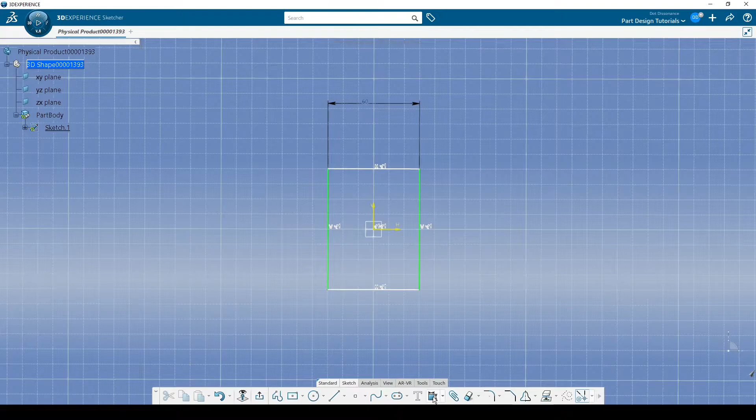So if I go 60 here, and then I go from here to here, and say 60, now when I put that corner in there, I won't get the error.

So I pick these two corners, or you can pick the point, and then it just drops out, and that's all fine. The thing it was doing was adding in a little point right out here in the corner, saying that this fillet exists, but this 60 millimeters is a point that is constrained to this line and to that line right there.

Go ahead and do that on your own if you want to see that. Now, I do have to talk about geometrical and dimensional constraints as well. So we've got our geometrical constraints, they were on, but the dimensional constraints were not on. So something did not happen right here, so I got to show you that as well.

Okay, so I will open this up, and I'm going to turn it on. It's a toggle, it's on or off, and it stays on or off, even when you close and open the program. So dimensional constraints is now on, and so is geometrical constraints.

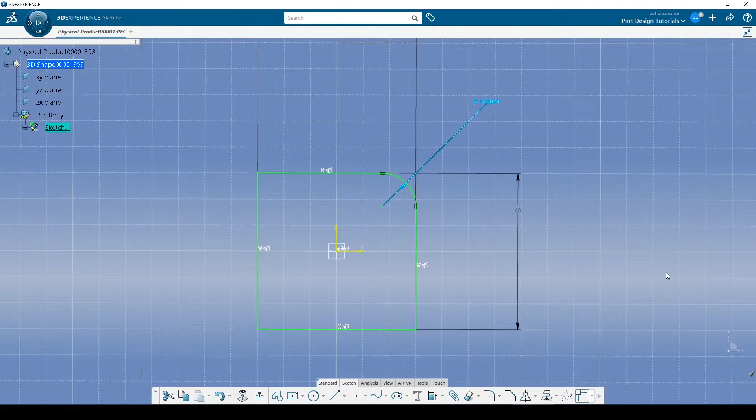So if I go here and I draw my fillet from corner to corner here, the corner, and I bring it in, now it includes a dimension, and you see it's green now because it's still fully constrained. So is that more beneficial to you? In this particular case, I think it probably is, so you would leave those on. Okay, so that's another little insight to what those things are about.

Now I can come in here and I can say maybe it's 10, and then I go through and do the corners on each side. And just to show you, I could grab the point there and bring that out, same deal. Make this one equal to the other ones, or just by hand go here and say 12, 12, 10, 10.

Okay, now I'm just going to leave it there for a second. I want to exit out of here, and we'll pad this up. I don't really care about how far I make this right now, because I just want to show you about the use of either the fillet or the corner in the sketch.

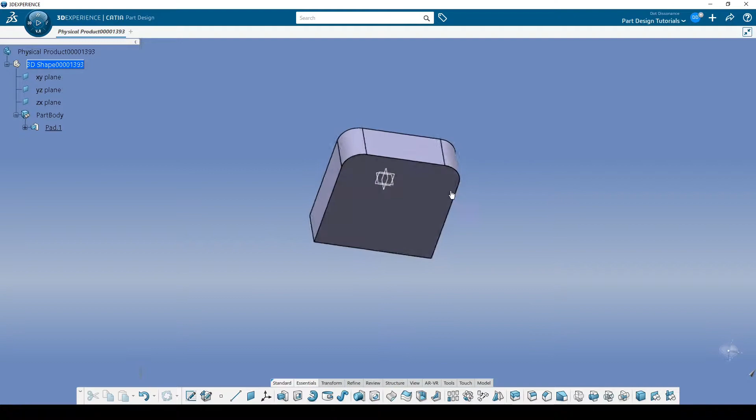But let's say I didn't like it, I want to change it. Well, I've got to know where to go to do this. Now imagine also we've got more items in the tree. I can click on this, it will show me the pad, I can hit the plus sign here, and I know that it's going to be in that sketch most likely.

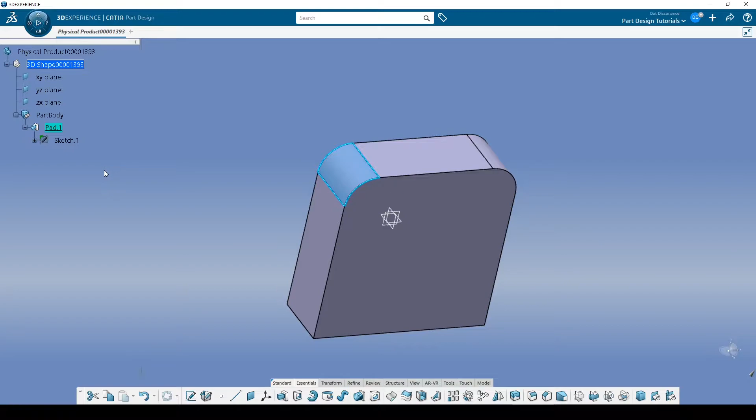But that's if you know that this is actually a corner. You're gonna spend the first couple minutes looking for a fillet. Honestly, again, you can click on it, it'll highlight where it is in the tree, and then you'll find it. So it's not a big deal, right? Kind of. But now if I want to change it, I have to change each one.

12, 12, 12, 12, 12, around there. I could make them be a parameter, and again, it would be fine, but typically it's going to be probably in your best interests to leave it just like this. You also have the benefit of having a simpler sketch, and that's a big concept in itself, is to simplify the sketches that you're creating. Don't put too many features in there. It's kind of a good way to think too.

It takes a little bit to stop looking at a diagram and draw every hole, every corner, every circle, and try to do it all at once. Try to break this down into multiple sketches in your mind before you start. So I look at this and go, you know what, just a sketch first, just a square, just a square. So we'll go ahead and do that, and then we'll pad that up some length.

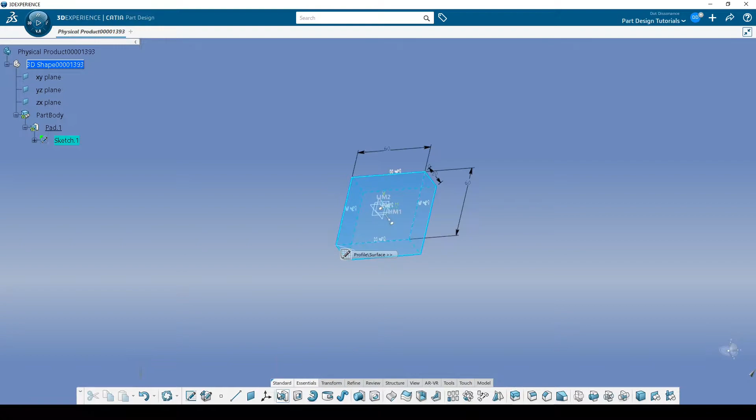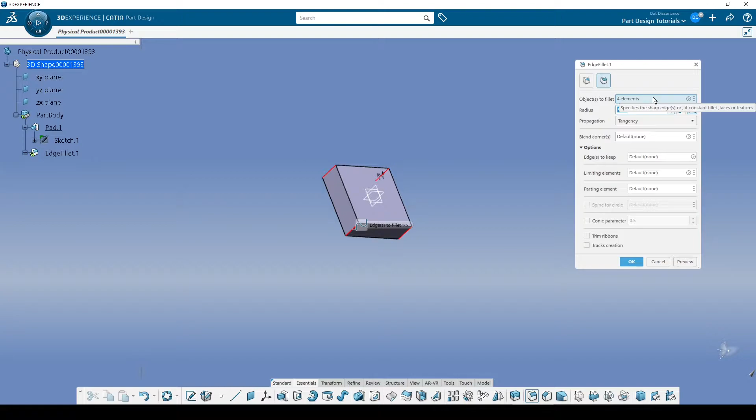Okay, and again, I'm just going to leave this at some value here just to demonstrate the fillet principle, I guess. Then we come by here, we grab our fillet, and I can pick this edge, this edge, this edge, and you can see already in the tree, it's over there. I can say that this is 10, and now if I want to change this because it doesn't quite look right, then I could double click this and say, no, I want them all to be 12, they all change, you see? So that's usually the better option.

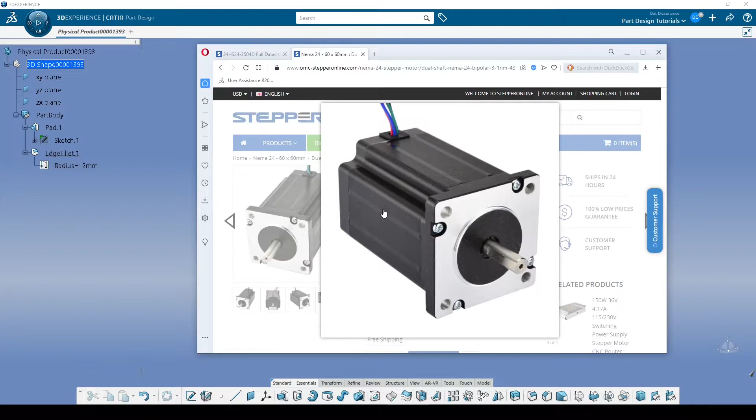So what I think I want to do is, well, actually, if you look at this, it does kind of extend up a little bit more right there. But I'm going to go ahead and just make the flange for right now. I'm really kind of hesitant on that, it's sort of a 50-50. So let's look at the drawing here.

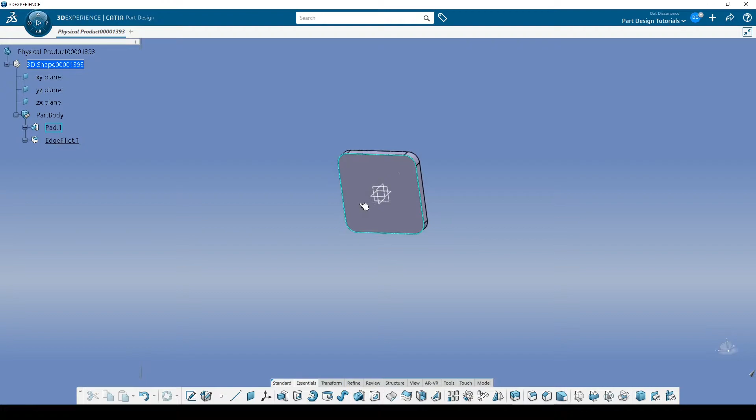If we look right here, we can see the width of the flange is 6.8. Okay, so that's easy enough. We'll go back over here to the pad and say 6.8, and that's going to get us our flange thickness. At this point, I can see that edge fillet, it's just not so good, so let's make it maybe 8. But again, the nice thing is, as long as we're focused on what is dependent on these features, we can come back at any time and change our edge fillet.

Okay, so then which side is going to be the rest of the model? Well, let's see, we started on this plane. Let's continue over into this direction. So I'm going to pick on this face right there, go into sketch, and then let's go back to our data sheet and decide how far out we want to pad this. Well, it's got to go 88. So I think that's pretty obvious.

Look around, see if there's any other determining factors. So 88 max, that's fine. We'll go with 88. But we have to take 88 and subtract it from here. You see? Subtract this from that. So that's cool, we could totally do that.

Then to call back to some other stuff we've looked at before, what I want to do in this case is write a parameter. I want to write a couple parameters just to put this out here a little bit more frequently. So I go here and over to my tools and find my formula. I'm going to make a new parameter of a type of length, right? I hit this, don't type anything in there first. First hit new length, and now this is the one right here.

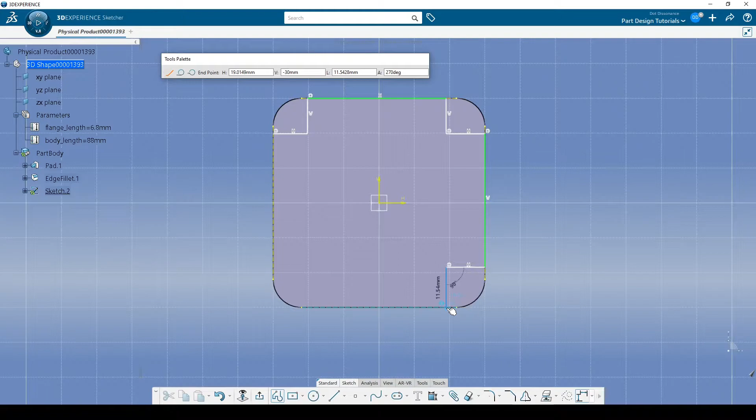So I go here and snap again to that yellow line. I go to here, bring this out. I'm snapping to that thing up at the top. Do I want that? Yep, that seems okay. Click, get over here to the other one. Now what if I didn't get it, right? No big deal, if I need it, I'll add it later. Get that up there, and then I'll snap to the original point.

Okay, so we've got this shape going on. Do you see what I'm doing here? This is to talk about sketch simplification. Is this the way I would always do this part? I don't know. As I'm making this lesson, this lab, going through this part, I've made this part a few different times now—actually multitudes of times over the years because we build CNC machines and I've had to model separate motors quite frequently. Do I do it the same way every time? Probably not, just because it's not the ultimate decision on the best way to do it. It's like, works good for now. Just start clicking, you see?

So if we go back over here to this, I want to talk about model simplification. In this case, this seems like a really good way to do it.

I could have padded the whole thing up first, and then just pocketed these holes down to here and left a little bit of a gap distance. We've done offset a little bit before. I could have made a circle up here, padded it all the way down to this bottom surface, but you're allowed an offset value, so I could do a negative offset and say come back 6.8 millimeters. I could do that too, right?

I think you could talk a long time about all the different ways you could do it, and you'll find out that 8 out of the 20 ways are all perfectly fine, and it doesn't really matter. You just got to make a choice.

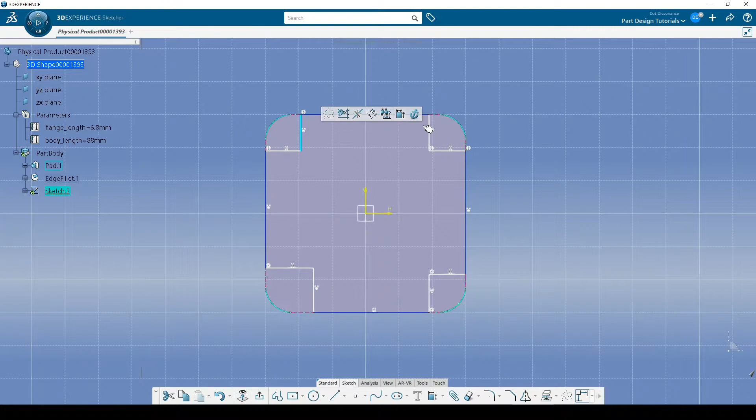So now I can pick this, add a constraint, and say that it's so far away from that edge line. I'll say that it's 10. And then I'll take this one and do the same thing right there, saying that this distance is also 10.

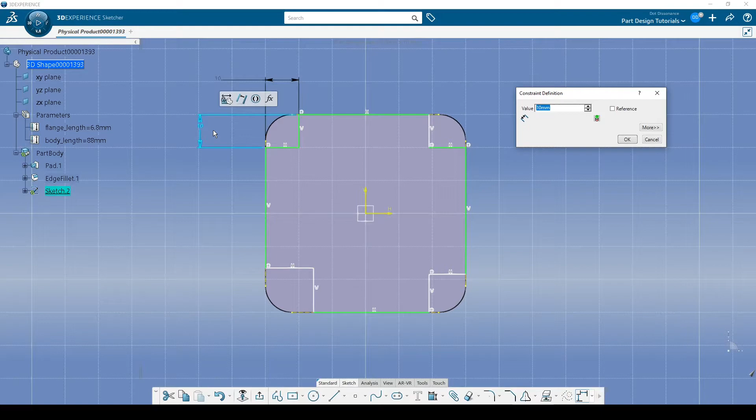Now I think it's a good idea to hit equals, click on your background, and select that parameter. We could make a parameter for this, but what I want to get going here is that I have this feature defined. Whatever this notch is, I have it defined by one constraint, so I can change it, and they all change because they are always going to be the same.

And I'll go through and do the rest. Now, as I click on this, here's the thing I think about as I do this. I start clicking around, and remember, you can't get to it from the other menu there. As I start clicking around, I start to notice that maybe this is taking a little bit of time, maybe this is being kind of long.

Well, I could have left it as a solid, and I could have made this one square as a pocket, and patterned it around. I could have done a rectangular pattern, I could do two of these, I could do a mirror, I could do a mirror in Sketcher, or I could do a mirror of the solid that I make. So just tons and tons of different ways that you could do it.

And this is why I'm saying that you make the model a few different times. As I make this, I keep thinking, man, for the class lab, I probably should have done it a different way. Let's do it a different way. Well, no, I just want to talk about this.

I think it's better for me to just mention that there are a myriad of ways, and you would probably make your model over and over again if you wanted to try to determine what the best one is. I would honestly have to make this video like 10 different ways, 10 different times, to show you all the different ways.

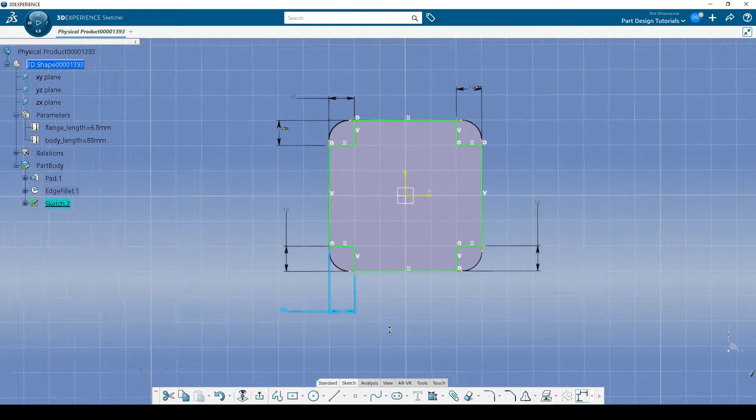Now, did you notice as I was constraining these that some of them I didn't have to constrain all the way like this one? That is because of the auto constraint that was made right here. This is even with this. And so if this is 10 and that's even with that, well, then I don't have to put a dimension out here.

So knowing that kind of behavior, if I was a little bit more mindful of what I was snapping to when I was doing this, maybe I could have gotten away with not having to do all of them, you see? So let's call this good. Again, many different ways to do this, but let's call that fine for right now.

We'll exit out of here, and then we'll pad that up. Well, how far? We're going to pad that sketch right there, and the length is going to be this body length, and you're probably going, yeah, but that doesn't include the flange length. I know.

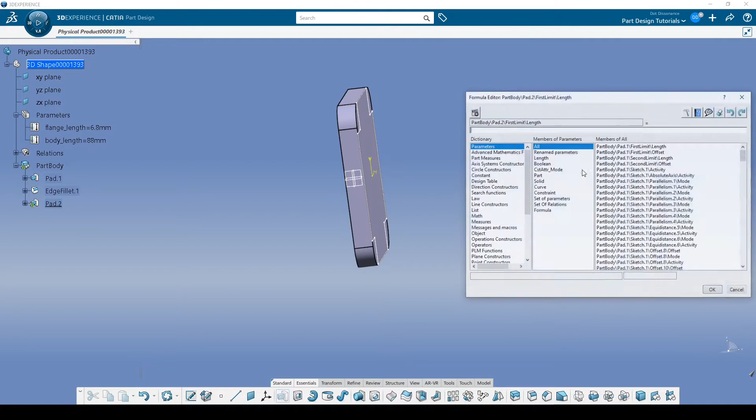So we go edit formula, and we come over here and say, okay, well, it's this parameter. You can go ahead and click it, but all the stuff that we make is under renamed parameters. So you go to renamed parameters, and we say it is body length. So we want to use body length, but then we're going to subtract whatever the flange length is. Do you see what we're doing here? Then we hit OK, and then we're done.

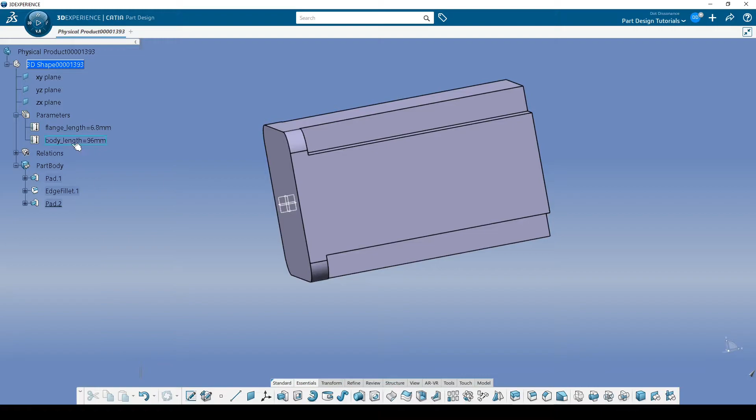So now, anytime I come back here and I need to make a larger stepper motor, or somebody that isn't me that just walked up to this and says, oh, body length, I need to change that. You can come up here and change this to 96. And I can tell you that dimension right there is not 96. So if I measure from there, you've got to pick these to there, the distance is 89.2. So subtract that, 6.8, right?

Okay, great. So then we'll come back to here and we'll probably end up modifying that curvature, that notch. You see, I didn't put a fillet on it yet. We'll deal with that later. It exists, but I need some context.

So what I'm going to do next is I'm going to make these holes. So they're 47.14, 47.14. Make sure you look at this, because there are a lot of things I deal with, the drone motors and some things are not always symmetrical, okay? So there are four of these at a diameter of 4.5 millimeters.

Easy peasy. So we'll go over here to the face, we'll pick on this, go to sketch, and in this case we will draw a centered rectangle, bring this out, and then make it a construction element, right? And then we go to dimensions, and we're going to dimension this.

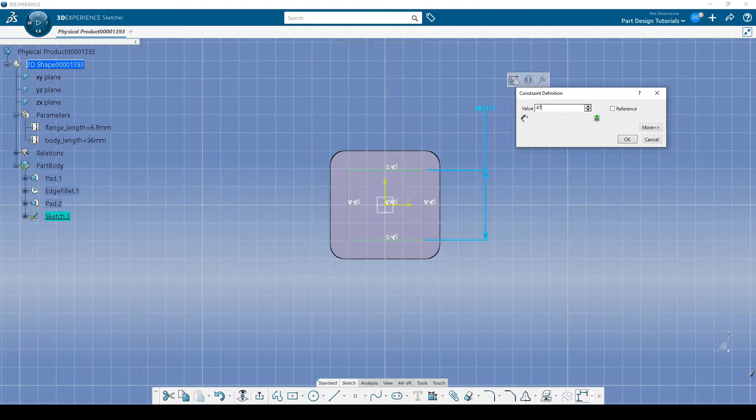47.14 was it, I think? Whoa, why did that just happen? And let me go check. 47.14.

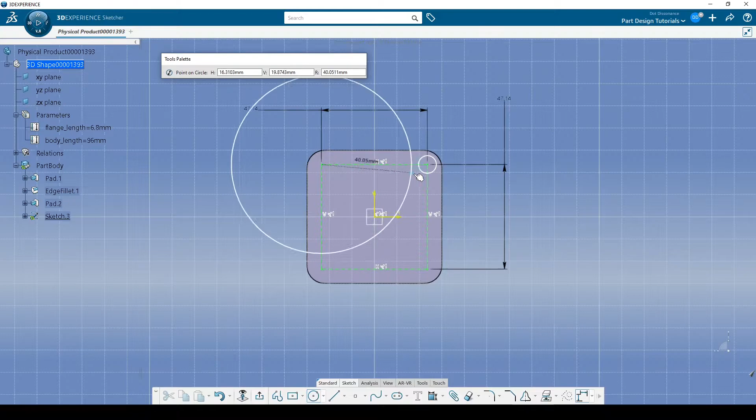Okay, now I can make my circles. Make sure your construction elements are not on, and then we snap our circles to the points right there. Now, get ready to hold your shift button down. And by the way, if I double click circle, double click it so it'll stay on, I'll snap it. But now the more geometry I have in Sketcher, the more things you'll find that it wants to snap to.

And I think you should probably develop a habit of holding down shift almost no matter what, if you're not certain that you need the constraint. So the first one, I know I needed it snapped there, but after that I hold down shift just to keep anything else from sticking to it.

And notice, by the way, that I don't really care what size it is. You see, that's another thing to think about, is I'm holding down shift, I don't get the constraints, and then just make it as big as you need, because maybe that's going to make it easier to select later. A lot of times if you're trying to get it as close as it's probably going to be and then dimension it, there might be too many features around there that make it kind of hard to get a hold of, you see. Now I'll double click constraints so it stays on.

I'll bring this out and I'm going to say 4.5, and then I can pick the next one. Oops, 4.5, the next one, 4.5, next one.

All right, now you notice that these are all on radius, so that's kind of an oops, right? So it's not a radius, they're a diameter of 4.5. Oh, darn. Well, here's the thing. In some other videos, you might have noticed this before just on your own. I want to do a thing. I want to make these things equal to each other, or maybe I want to make a parameter for them. For whatever reason, they don't like diameter for parameters, right?

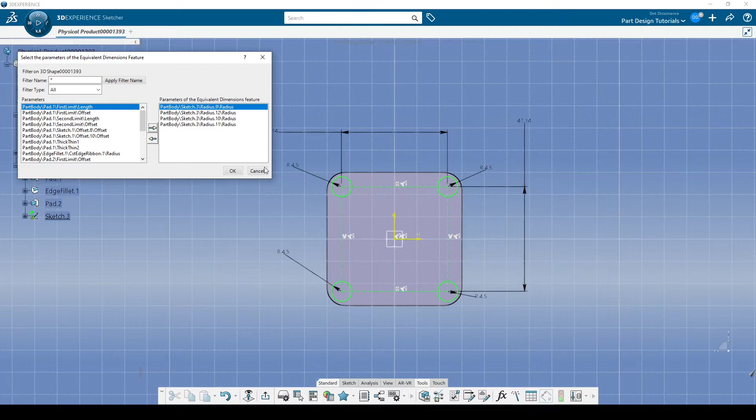11. Okay, so now all of those are added in, and you hit OK, and it says, what do you want these things to be? Okay, well, I don't want them 4.5. I need them 2.25, you see? And now they'll be equal to each other.

This happened, by the way, in a previous exercise where we want a dimension. So we've got the job done. They're all equal to each other. They're a radius, that's fine, except us humans looking at a data sheet, we want to change it to 4.5. We might not want to do the math. This might be a lot deeper decimal number than 4.5, and the math might be a little bit harder to do, or I just don't want to do it.

So what you could do, again, what we did in previous lessons, is make a parameter for the diameter, and this thing here is a formula, so it's half of whatever the diameter is. That makes it easier, okay?

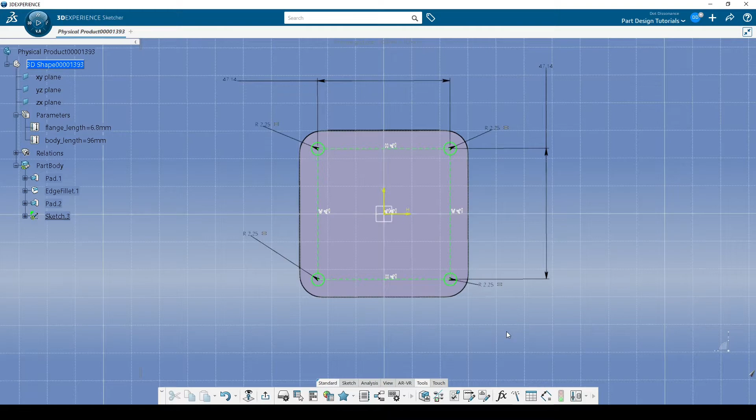I'm going to leave this one as it is right now because I just want to show off the equivalent dimensions feature in Sketcher. Then we'll exit out and pocket these up to what? Up to last? Well, we're going to pocket them up to here. We could make it a dimension, right?

6.8, and that's what the flange is. That almost never makes sense, by the way. So many people do this, or they just make it a million or whatever, right? Use these, learn to use these.

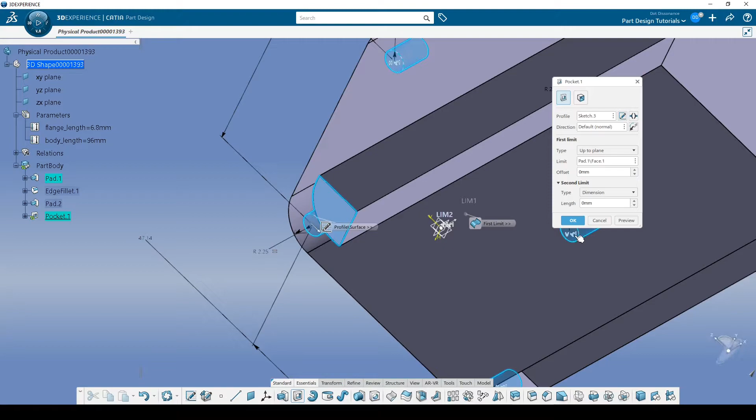Up to plane, up to surface. It is a surface, but we're doing all of them. This is a surface, that's a different surface over here. So pick up to plane, and this will make an infinite plane for everybody to go up to, and no matter what, if we decide to change that flange length, that will change. Oh, by the way, our flange length right here, that's 6.8, we never associated it to our first pad.

So let's fix that real quick. See this right here, 6.8, hit equals, click on the background, and now it's associated to that formula right there, that parameter. So let me show you what I was talking about with the hole now.

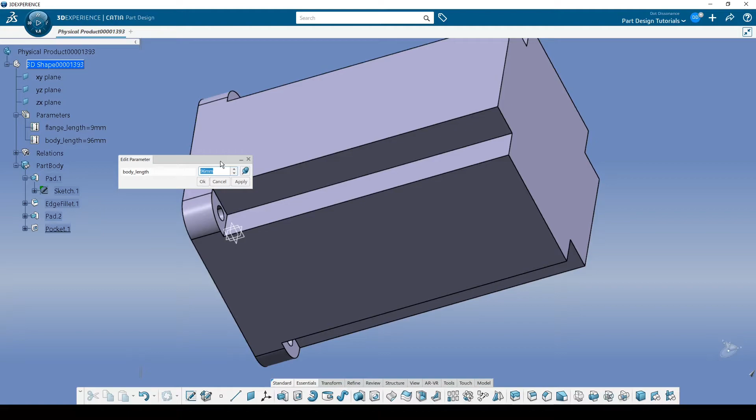So if I make this, instead of 6.8, be 9, well, that right there is still going all the way through. Obviously, the flange changed size because we associated it, but also realize that this body length of, well, 96 - I got to change that back to 88. The body length here is still 88, the total body length, because it always subtracts that flange from it.

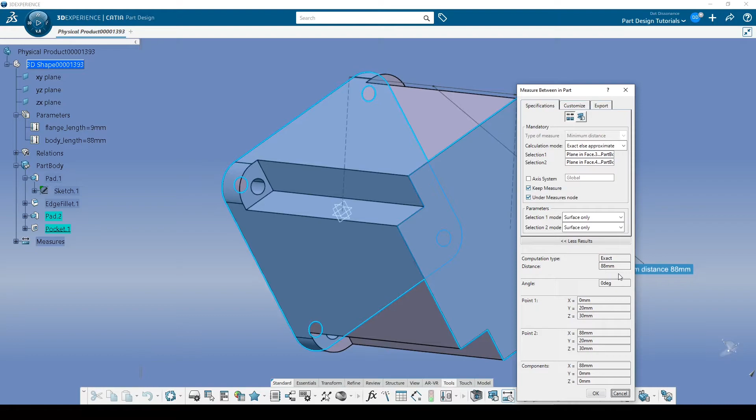So let me show you with the dimensions again. Surface, surface, sure, here to here, 88. You see? I don't need that there.

Use your parameters, get used to these things. They are pretty much mandatory once you start to get used to them.

Okay, so we are kind of almost done. Kind of. So let's see where these holes sit right here, right now. And so then we want to decide, do we want to pull this in or not? How do we want to deal with the fillets?

Well, let's do the fillets first, because I can tell you that those are semi-arbitrary. They kind of don't exactly matter terribly too much. We just want to model it in just for looks, okay? So we'll leave it at 8 for right now.

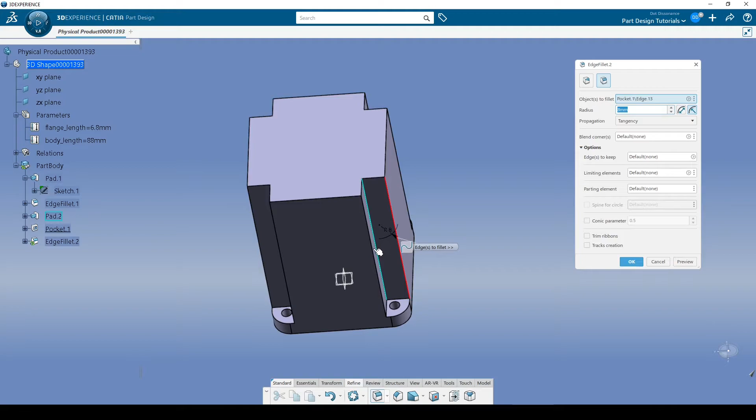Pick here, pick there. Remember, you can turn on hidden edges if you don't want to have to rotate around. I find that turning them on and off is about equal to me just rotating the thing around. Then let's say 10 and see what that looks like. That's entirely too much, right? So we'll say 4.

Might be a little bit more than that or a little bit less than that, but we'll see in a second. And now this one right in there, yeah, let's shrink these down just a little bit more. Make it 3.

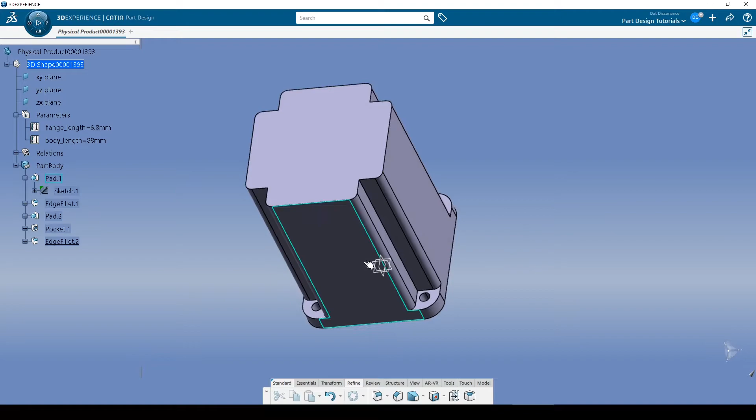By the way, very specifically, I'm making this fillet separate from these fillets because of the purpose, which I'm going to get to here in a second. So let's go ahead and just add it in, and then let's talk about that. So put these in, and we'll just make them, I don't know, 4 or 5 or something.

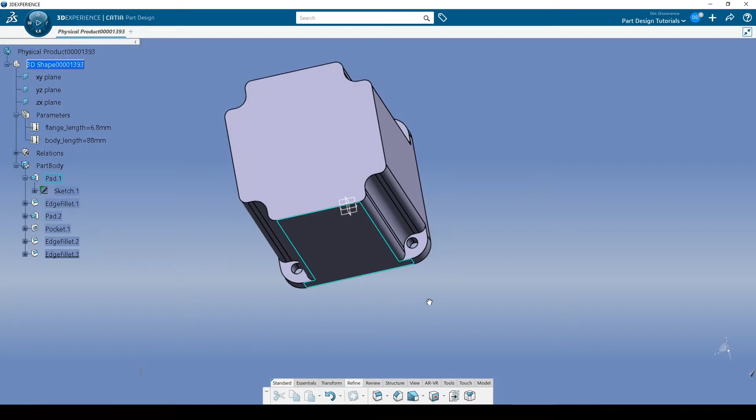Okay, so what is the purpose of these grooves? Well, what you're going to attach the stepper motor to the body with is a socket head cap fastener screw, okay? So if you want to look this up, which I'd suggest if you really want to do this, the hole was how big? The hole was 4.5. Why is it 4.5? Because it's for an M4 fastener.

So you'd go look up an M4 fastener and figure out what is the head of an M4 fastener. So you'd search M4 socket head dimension.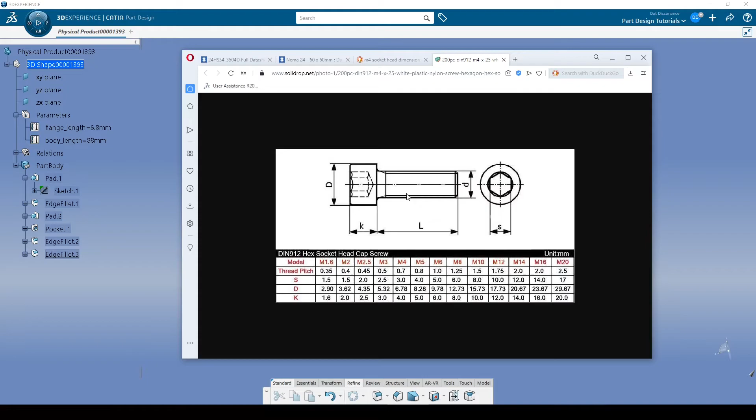At least we can go, yeah, I kind of know that 6.78, that's probably going to be plus or minus a little bit, probably normal, right? From a socket head M4.

Then knowing what we know now, we look at this and we see that, okay, well, we understand that this groove here is for the head of the fastener, about 7-8 millimeters or so, right? Enough to have clearance for the head of the fastener and the wrench that's going to come down here to try to tighten it. So we need to try to pull in this feature.

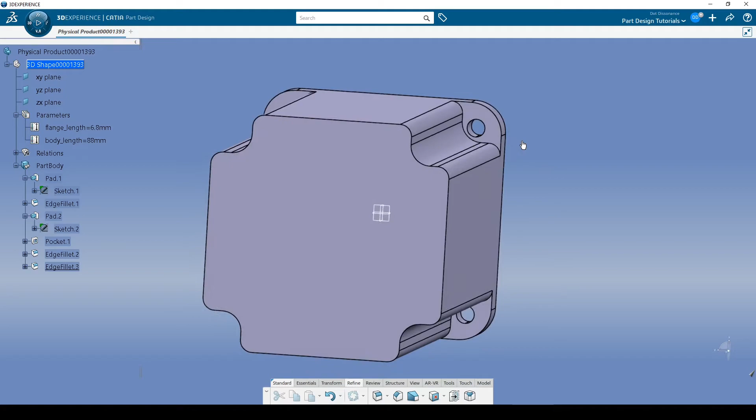But this is the point that I want to make about a lot of this: do it again, in order of operations. You really never get it right to begin with, and you have to come back and make a change. So what I could do is come back to this pad here, edit it, and start pulling these in a little bit until it looks like it gets to where it needs to be.

But that's the bad way to do it. That's a bad way to do it. What I would really like to do, now that I've started to build the model and got kind of dug into it a little bit, I went to do a thing and then I went, well, wait a minute, what's the purpose of this thing? Oh, it's for this. And that means then that this needs to be this dimension, shape, this far away, or whatever the case may be.

Well, inevitably, it feels to me like anything I do to this shape right now will be a band-aid. And what I need to do is fix it from the get-go to make it right. And what I mean is this fillet that we added right here and that corner that's right there, we need this element here to be somehow relative to this circle.

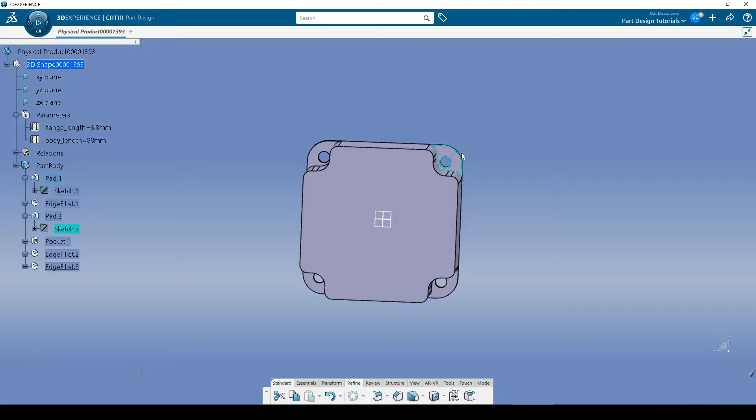What would be really great now that we're here is that maybe this thing was just a square. Then we just make a circle on, say, the face of this up here that is concentric with these holes here, but the right dimension, and then we pocket it down to that feature. You see kind of what I'm getting to right there? So let's go ahead and do that, except we have another problem, which causes us to have to learn another thing.

I want to go here to this shape right here. I want to get rid of these lines, and I'm going to turn them to circles, and make them concentric to, oh, where's my holes? The holes here, see, we're here over in the timeline, right? In the tree, we're here. The holes are in the future, so I can't see them yet.

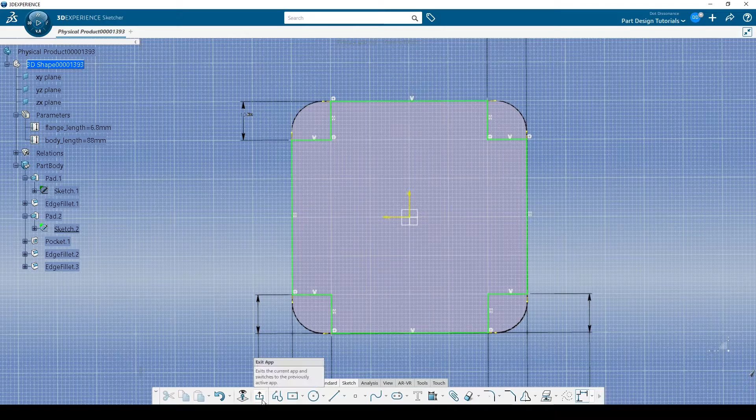So what I need to do is either delete a whole lot of stuff or figure out how to change things in the timeline, reorder them. Now, in order to talk about that, well, I can just tell you how to do it. It's going to be something like take this pad right here and you go to reorder, and I'm going to say that it is after, before, or inside a certain feature. Everything that's yellow, I can't put it there, but I can put it after pocket 1, and that's what we need. If I put this feature here after pocket 1, then I'll be able to see the holes.

Now, if this wasn't such a simple tree at this point, and we didn't just make it, you might not easily know or remember what thing is dependent upon another.

So we have this really great feature that if I want, I can right click on, say, pocket 1 right here, and I can go to parent and children. Parent and children will show me what elements are dependent upon what. So right now you're seeing what are the parents to pocket 1. What is pocket 1 linked to, connected to, based on? And that's hugely important.

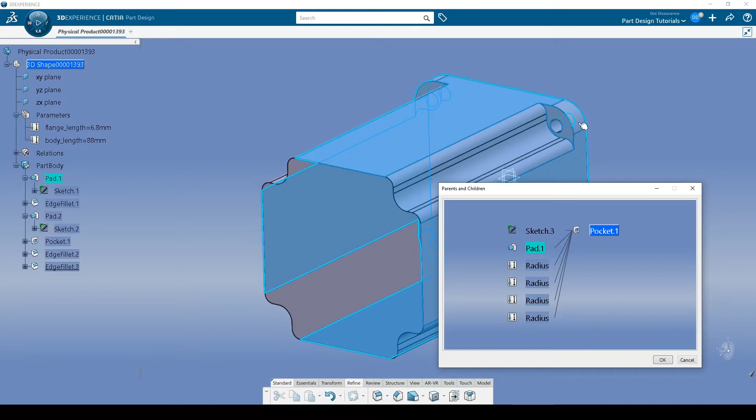So if I look here, pad 1, yeah, that's pad 1. Oh, of course, because pad 1 is what made that flange, and that's what I've got the pocket based on the face out there. Sketch 3, oh yeah, so that's my sketch right there. The radius is inside of it, you see?

Now, if I want to take this a little bit further, I could go ahead and double click on, say, sketch 3, and then it's kind of hard to work around in here, but it'll show you what are the parents and children of sketch 3. Let's go to a different one.

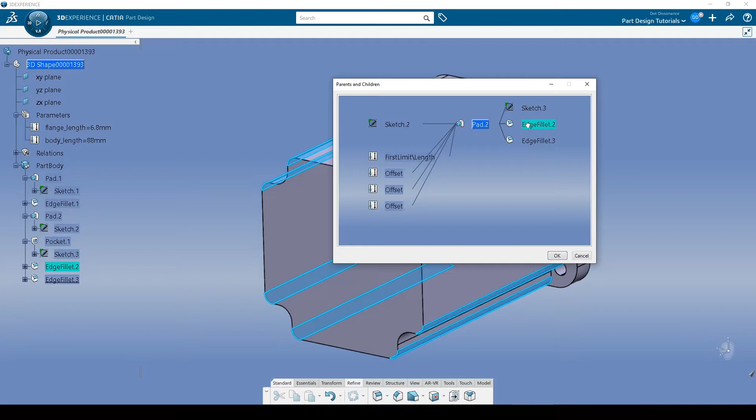I'll show you pad 2 because we're going to end up moving this around. We'll go to the parent children of that, and we can see that pad 2 is based on sketch 2. And sketch 3 was made from pad 2, and the edge fillets after it.

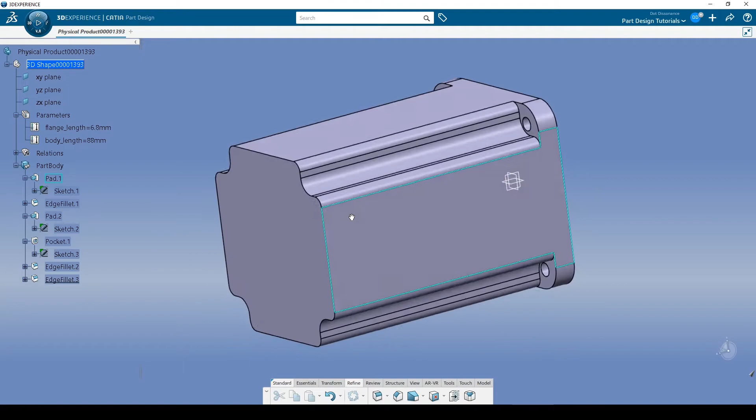But if I go into sketch 2, you can see that sketch 2 was based upon pad 1, edge fillet 1, and some offsets there. Remember that. I don't use it all the time, but it's really important if you want to see why certain features might be giving you errors, because it's tied to another thing.

You try to delete a feature and 16 other things disappear that you weren't expecting to disappear. Well, it's highly likely that those things were in some fashion connected to the other. So then, time to fix.

So what I need to have happen is I need this pocket to be before this pad, because this is the pad that has the sketch in it that we want to align with that hole. So I'm going to right click on pad 2 and go to reorder, same thing I just showed you a second ago. Then I'm going to say after pocket 1, hit OK, and now it moved.

Don't worry about what just happened. It moved pad 2 after pocket 1, but it does an interesting thing. The underline is where you are in history, so it's a marker. We just rolled back time to where we're back at edge fillet 1. It's kind of a thing that it does when you do this.

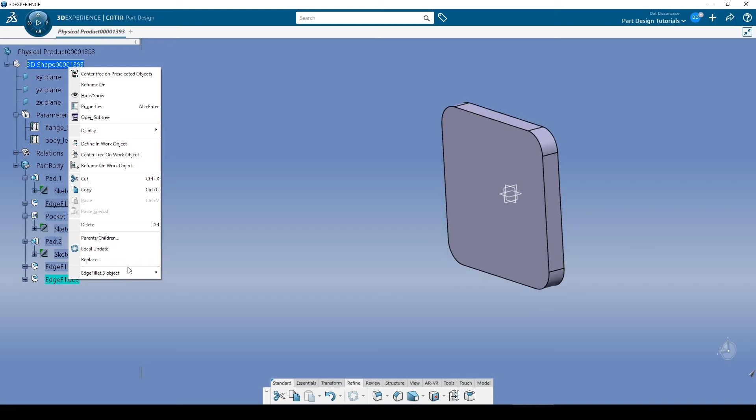So you have to remember to right click on the most current item and then come up here and say define in work object. That will move the line forward, and there's all your stuff. That thing right there that just happened gets a lot of people.

They don't know what's going on. They think they just blew up their model, and then they continue building. Later someday they realize that the timeline's not right. They reset it, and now all of a sudden all their parts come back over the top of all their other parts. So now let's check this out.

So if I go to pad 2, the one that has our kind of rectangular shape on here, if I double click on this, now I can see my holes. So now everything is much, much better.

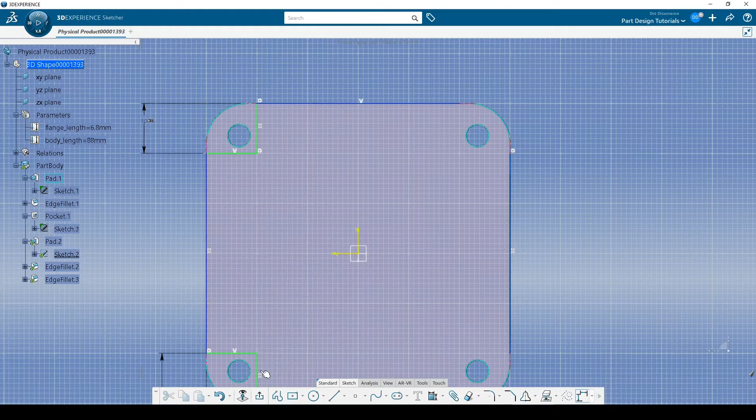So now what I'm going to do is we're going to bring some lines back a little bit, but I'm going to get rid of them for the time being. Oops. Oh, that's because it's got a formula attached to it. No big deal.

Then over here on the side, I almost always do this off to the side. Let's double click it, and we'll just make 4 circles. I'm going to hold down shift and just make a bunch of circles right there. Hit escape to drop the tool.

Then I can come over here and say constraint from that to this edge right there, and then you can come up here and pick concentric, or you could right click and say concentricity. Either way, I'm kind of still used to right clicking. Oops, didn't get the right menu. Hit your constraint, hit that, get right on the edge there, right click concentricity.

The other way you can do it is I can hold down control and pre-select the two things and then go to constraint and do concentricity. All right, and the last one.

Now we need to dimension these. So that's already known, right? So this one here, should we go 7? Should it just be a snug fit, or should it be 8? Let's go 7, we'll say 7.

Oh, and remember it's a radius, so we have to change this over to diameter. I'm not going to write a parameter or anything for this, I'm just going to leave it be 7.

Okay, so that's going to be our circle, but we have to get it connected to these lines over here. To do that, we could make this a construction element, and then draw some lines up to it and do an arc around it. We could do some trimming, but I don't think we've done any trimming yet, so let's do that as well.

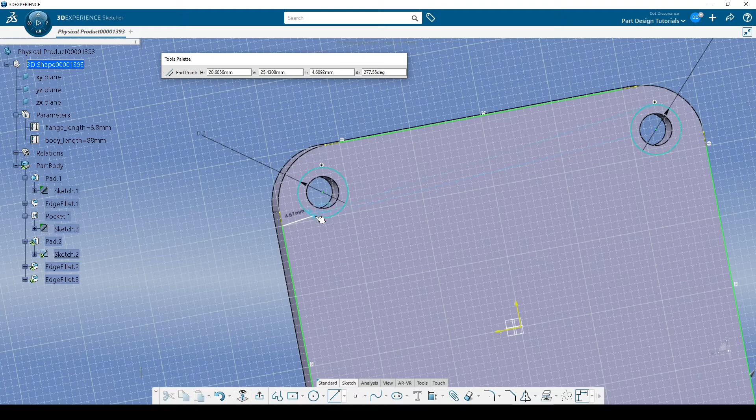So we'll get our line tool and bring this up here and stick it right to this. Now, do you want to go right to the edge of it right here? Well, here's kind of the thing. I want this circle to drive the length of this line right here.

So you see it moves, right? It's not actually anchored by any dimension. Don't put one there. So here's what we'll do: I purposely moved it down, and then I go here, and then I pick that just on the edge. You see?

Now what I will do is take that line, grab my constraints, and pick this one right here, right-click, and make it a tangent.

See, so that's going to force that line to be tangent with this circle right here. Then I'm going to make it perpendicular to this line, or horizontal or vertical, either way. Let's do a perpendicular.

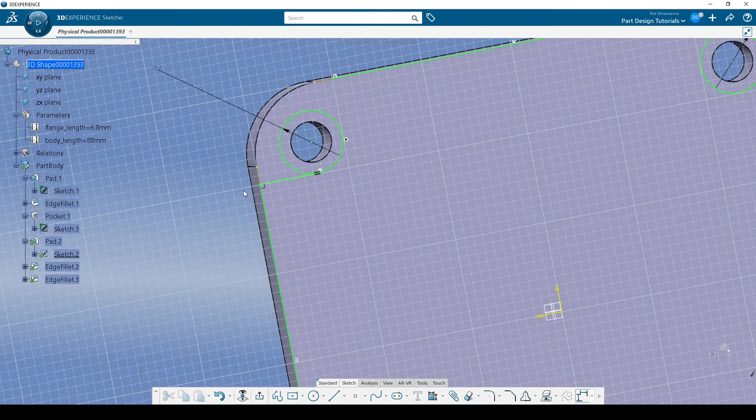Perpendicular. You see? So now that puts a nice little corner. So I know that this goes up, comes straight out, hits that corner right there, and back in. See where we're going with this?

Okay, so now that's done, the next thing we got to do is get in here and trim some of this stuff away. We have a few different features down here: break, trim, and quick trim. I can tell you the one we want to use is quick trim. Trim and break are kind of for other different things.

You might want to test those on your own. That would be for a later video. Trimming excess elements or breaking a line, and it actually doesn't erase one, it leaves two sides. So you can take one line and break it into pieces by an intersecting line.

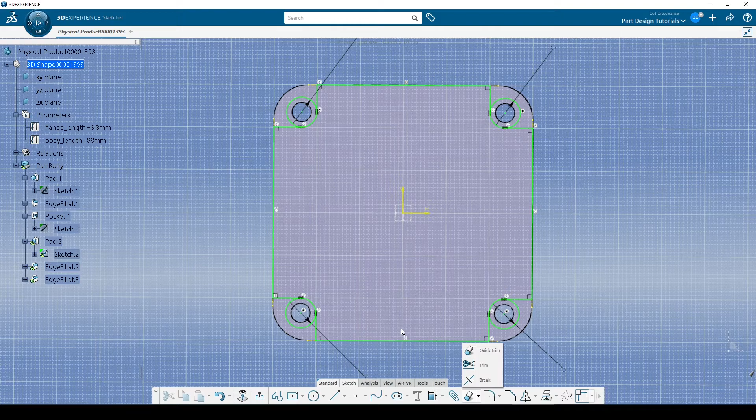So we just picked the quick trim, and it works probably just as the way you would imagine. It's an eraser tool. So if I come up here, I pick this, it trims it to the limiting elements there. So it works pretty good.

So I'm going to double click that to keep it on. We'll erase that, and we'll erase that right there, and we'll erase that. And then we're done. By the way, notice with just our geometrical constraints and a few dimensions on the circles themselves, we're able to fully ISO constrain this entire sketch based upon the curvature, that radius right there.

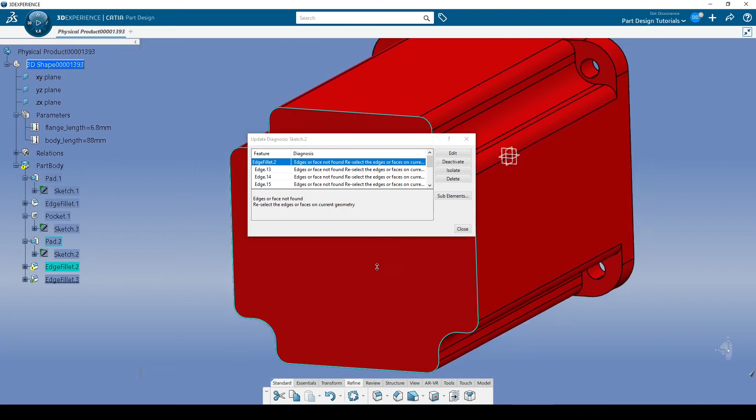So then we can exit out and then we're going to have some problems. Now, depending upon what you do, you could have more or less problems. I do want to mention this.

Red is bad, right? Red looks bad. Well, I want to tell you that red doesn't mean error, it means update. Just kind of letting you know it's trying to update. Sometimes, especially in the older days if you had a slower computer, as soon as you make an edit in sketch and leave, your part goes red for just a quarter of a second, but then it's fine.

You're like, oh, that was weird, it was red for a second. Well, it was updating, updating the part with the new information. Right now it's trying to update, but it's stuck because it's saying something is not working.

Now, I can tell you, though, thankfully, the things that are wrong are just these edge fillets, and that's not even a big deal. So what we got a problem with, if you look over in the tree, just learning how to read this, the part body has an error.

What part of the part body has an error? Well, it's edge fillet 2. It looks like there's something going on with edge fillet 3, but if you look close, this is a little swirl - that little swirl icon is the update icon.

So edge fillet 2 has an error, and because edge fillet 2 is having a problem, edge fillet 3 cannot update. It can't apply the information, you see.

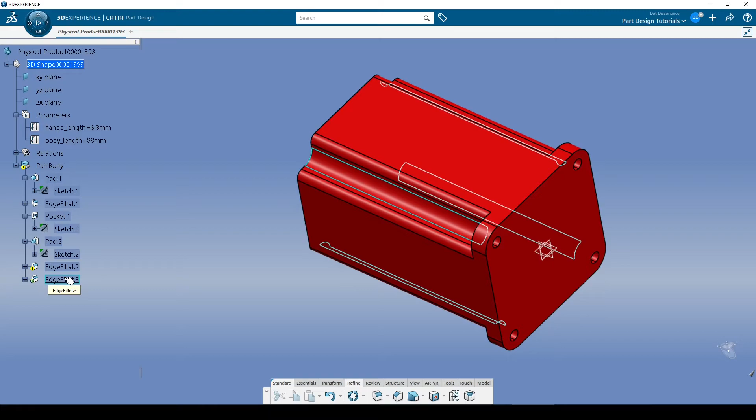So when you get in here, what you see are these yellow dashes, and they're trying to tell you that this is where the fillet used to be. The part that's kind of confusing here is that that edge still exists. So you think, well, what's the problem?

Well, whenever you change a feature, like the sketch that we did, we changed it enough to where these edges, yes, they still exist in the same place that we had them before, but somewhere in the background of the database of the CAD software. They're not named the same any longer. So the link that they're tied to got broken.

It's real easy though. You just come by here and you pick all the edges. I'm not picking the yellow, by the way - I'm not trying to dodge it. I'm just saying know that what I'm picking is the actual edge of the model.

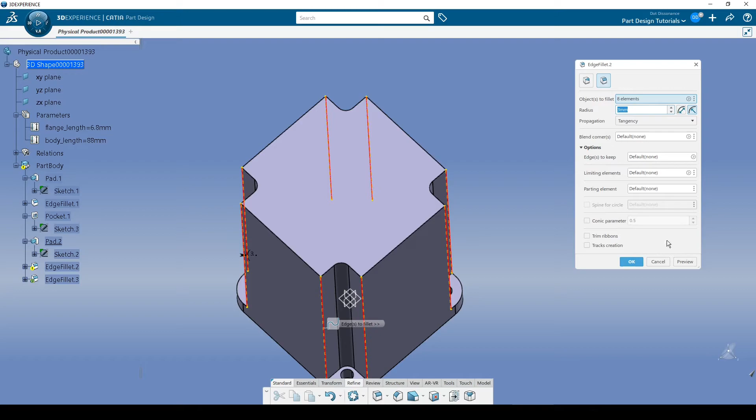So sometimes it might show your features floating out in space because the edge was far away. You would pick the new edge to go to. So pick that one, and that one. 3 millimeters will be fine.

But then the next one that was waiting to be updated has some issues now. We're going to do something different with that fillet, which doesn't even exist anymore since we're not using it. We could delete it here, but we'd have to delete all the edges. It's easier if you just go here, hit delete on your keyboard, and get rid of it.

So it looks like almost nothing changed, because that edge fillet happened to be just about the size of what the curve was that we added into the sketch, but all is good now.

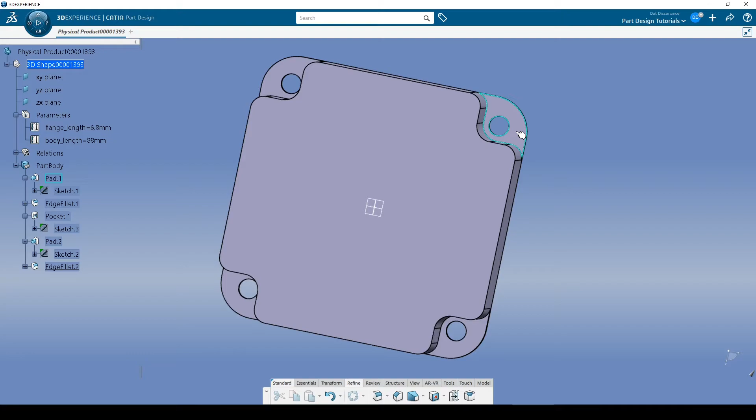If I wanted to test this out, I could check the radius right there to see what it is. I could go to a sketch, model up another fastener, and actually try to put it in there. That's a really big benefit of assembly, something that's a bit down the road, where you start making other parts, bring them together, and then you can look around at them and measure them and check for fit.

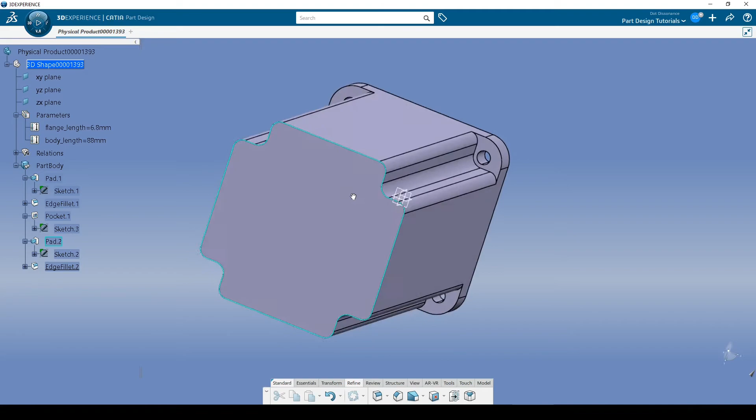So we're done with that. We're almost done with this device. Only a couple more things to do. The next one will be super simple.

We need to go back to here, back to our drawing. This circle right here shows us that it is 38.1 millimeters diameter, and it's also 1.6 millimeters tall. So we've got it all right there, right? 38.1.

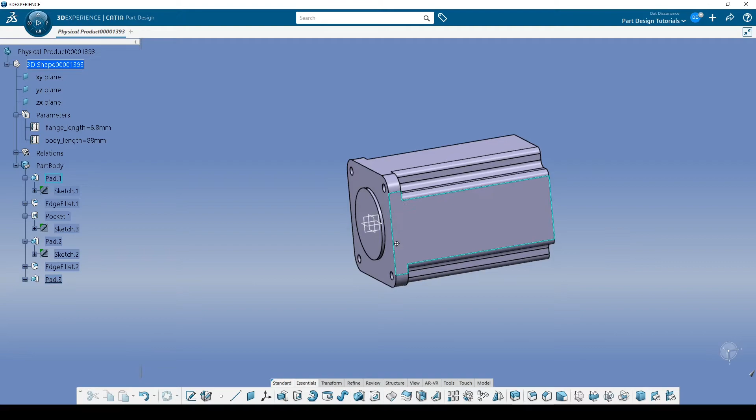Click on the face, go right here, make a circle, snap it to the center, bring it out, dimension it 38.1, then exit out, move over to the side a little bit, and we'll pad it out 1.6. That's kind of it, you see?

Now if you actually look at the device, just a thing I always do because I know it exists, you see right here there's a tiny little bit of a chamfer or slope. It's a draft, just a little bit of a draft. It could actually be a fillet too, whatever you want to do here, but there's a little bit of something going on there. So since we've done this recently, let's add it.

We come in here and go back to refine to get to our draft. To define our draft, we need the face to draft and a neutral element. We're not going to do any fancy stuff, no parting element or limiting element. We're just going to say draft that face, and the neutral element will be this.

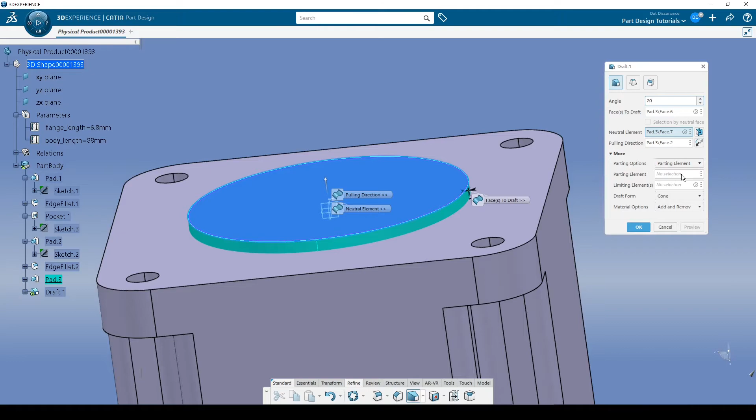I could use the base down here, but let's make this a little bit bigger, let's make it 20. We'll preview - you see the little skirt that's getting drawn out here, coming down from the top. The top dimension will remain that 38.1.

If I use the lower base of the flange as the neutral element, it will bend everything inward, and now my dimension will be incorrect on the top - the 38.1 will be a little bit smaller. So actually I think this might be 20, let's just hit OK and see how this goes. That looks nice.

So now this is actually a dual shaft motor, so we'll have to do both sides. We could make one shaft and shoot it all the way through, but I think we'll make each one separately. What we're looking at here is a few different things, so let's zoom this in a little bit.

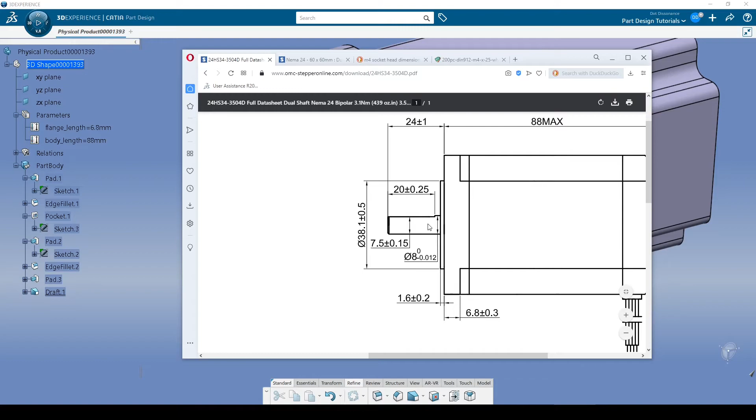So we've got this dimension here, 7.5, but we've got this 20 right here, and you see this little notch? Well, this isn't really the keyway per se, but this is where we're going to put an Allen set screw down here to lock a coupler onto the motor. So that's a flat section - it's saying that flat section is 20 millimeters down, and from the flat side to the other part of the round shaft is 7.5.

So that's not the diameter of the shaft - down here is the actual diameter. So it's an 8 millimeter diameter shaft, and the top of the shaft is 24 from the base of the flange. Okay, so 8 by 24. Let's go ahead and model that up.

Okay, 8. Oh yeah, see this here? No.

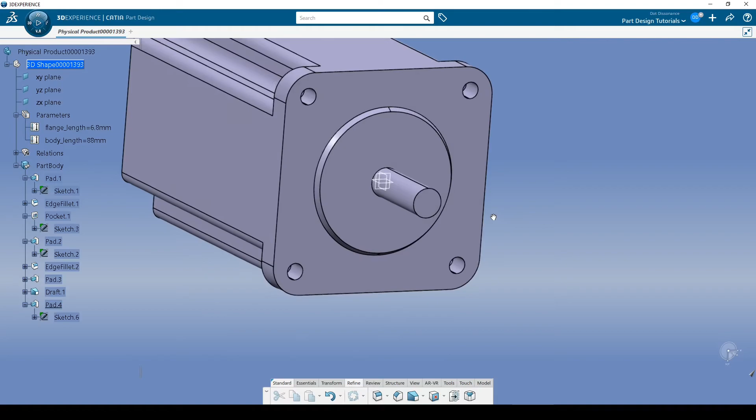Come back to here, 24. Okay, and since we're here, why don't we go ahead and model on that flat bit. Here's how I would probably do that. We'd go onto the face of the part here, and this is where it could be helpful to turn it off to the side because there gets to be kind of some stuff in your way. Now you can model it on any side you want, you just need to be able to measure from the flat to the side.

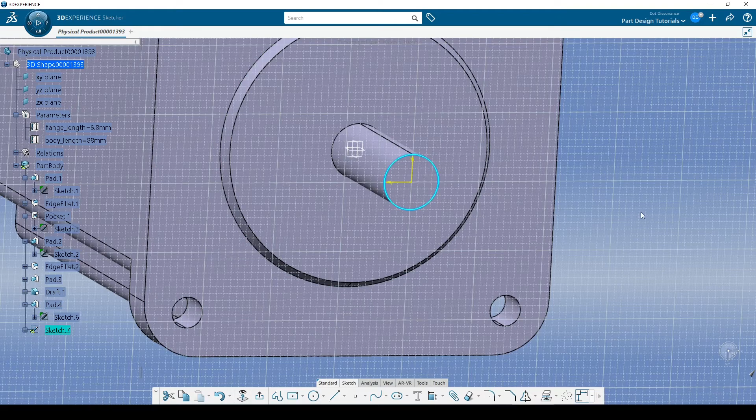So what I'll do first is I'll project it forward. I think this is probably the quickest way to do it. Do not, in this case, make it a construction element, okay? So then I'm going to take a line tool and bring it from here straight down, and I'm going to get it to be blue because that's going to snap it. In this case, it's horizontal.

It's kind of interesting that when you go into sketch, we have this position sketch. If it hits the normal view, it'll flatten out and show you which way it actually is. So at any rate, it's flat, that's what I'm concerned about most.

And then I can hit my dimension and go here to the other side, bring that out. Now that's 7.5, do you see? And so now it's all green, it's all locked up, but I've got to get rid of this other side.

So this part's pretty cool because CATIA works with projections in kind of a different way from most. A projection is immovable, you can't change it, you can't alter it. And so why did I do this? Because I need to trim it away.

Well, what they'll allow you to do is I can take my quick trim tool and come over here and click the edge of this and, well, not delete it. If you look what happened, the circle still exists. I'm not modifying the diameter or the shape of the original circle, I'm just saying the projection that I have over here, just don't show some of it. And so now I have just this sliver that I need, and I can exit out of here.

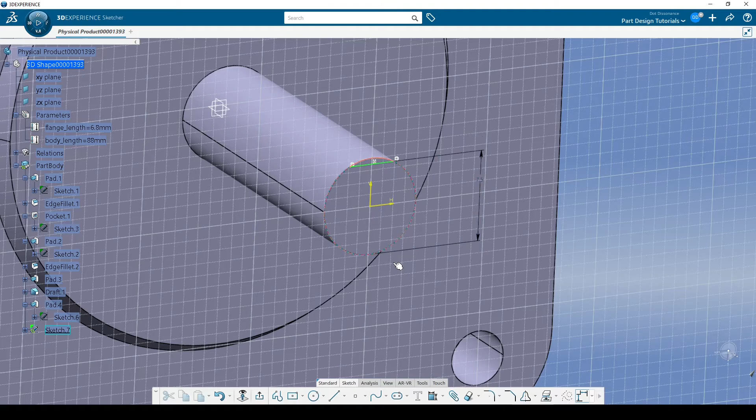And pocket it down. Pick that. And I don't know why it's up to plane, but we'll go dimension, we'll change it to 20 the way that it said, and there is the little notch in the end of the drive shaft.

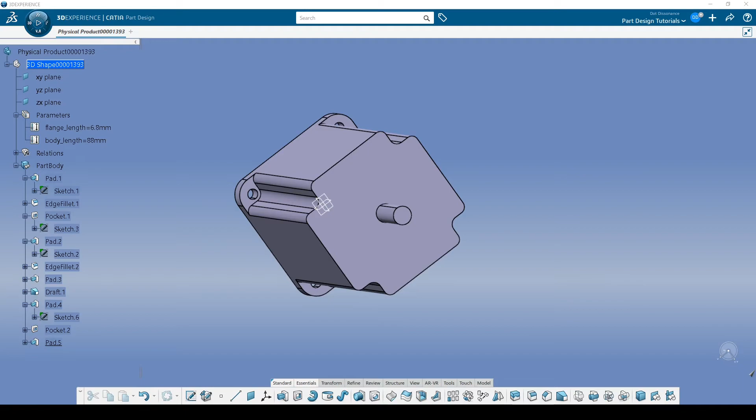Okay, so let's roll this around. We'll go to the back side here and we'll do it one more time. So pick this, pick that, make it be 8, pad it up, 24, and then check, because it's not always the case, but make sure you check to see, does the other side actually have the notch in it?

So we'll just edit our pad, we'll say that that's 15. We'll go into the face, do the same thing again. So here again is what I did: zoom in here, pick this, project it, click away.

Now draw your line tool, again wherever you want it to be, bring it down like that, dimension that 7.5 from the edge. Now it went crooked because I didn't pay attention to how I was snapping it, so I can right click.

And I can say, you see the horizontal axes right there? Don't worry, it's kind of rotated around again. So I flip it there, it's horizontal, vertical, whatever, it's parallel.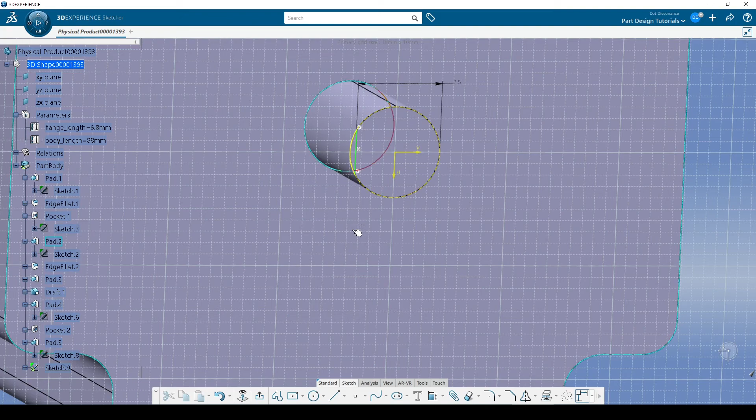And now I can erase the side that I don't need. I'll have that again, and I can exit sketch and then pocket that down.

Do I want to do it all the way down, or do I want to leave a little bit like we did on the other one? If we want to kind of make it like the other one, I guess you could make it be 12. I don't know, I kind of don't like the look of that.

Yeah, 14. Okay. So, basically done, right? So there is our stepper motor, but we might want to clean this up just a little bit more.

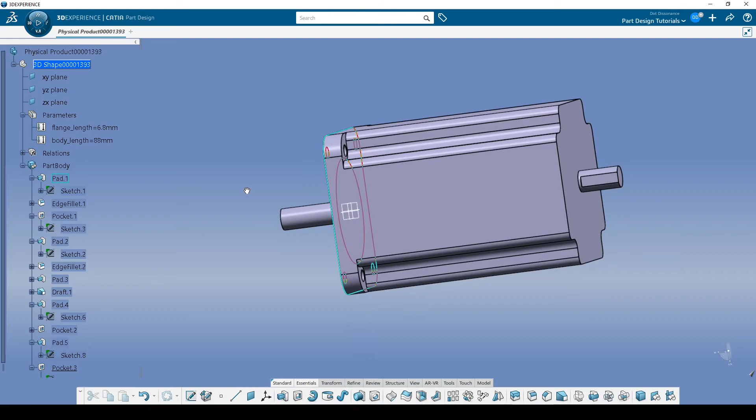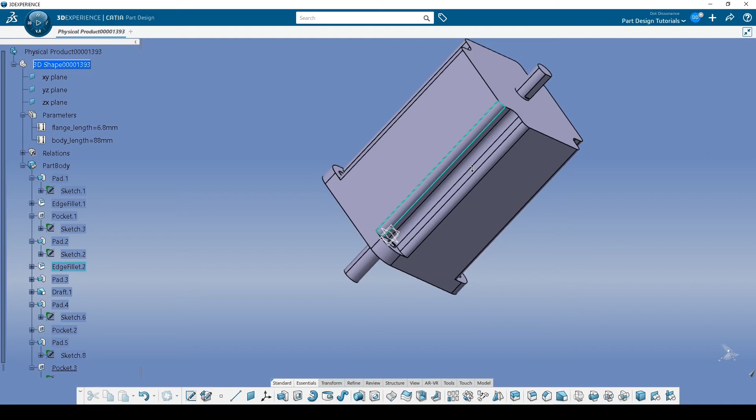Certain faces have fillets, other ones don't in real life. Almost everything gets a little bit of an edge on it except for like machined faces. So I would consider this front face to be machined. If I want this to mate up with another flat face, I don't want to see a little bit of seam left behind because I filleted this edge, okay? But I might want to do it on here, or specifically up to here. So right here, your call there. It would not be a big fillet if you did it, right?

Let's look at the part. Let's see what we see in real life, because it's probably not going to be in this type of a drawing here. But if I actually look at it and kind of look around, actually, if you look right here, there's a little bit of a chamfer on there. So that's a chamfer, not so much of a radius. So we can put that in, and then let's click around.

You see back here, there's a little radius there. And is there one there? You see, is it sharp looking? Well, it's not quite sharp. If there's any hesitation, that's probably because it's been deburred a little bit and it's not a sparklingly sharp edge. So if you want to add that in there, that's cool.

So here's a different concept. Are you making this for a different type of 3D environment, as in a rendered environment? Am I bringing this into say Blender, one of the stretchy pulley, sculpty modeling type tools, so that you could skin this and texture this to show off the finished CNC part like it's sitting inside of a shop somewhere? Well, then maybe if the part has certain looks to it because it's been handled or deburred, then sure, go ahead and add it. If it's for the shop, then maybe you don't do that. Maybe it's a different type of presentation that you want to have.

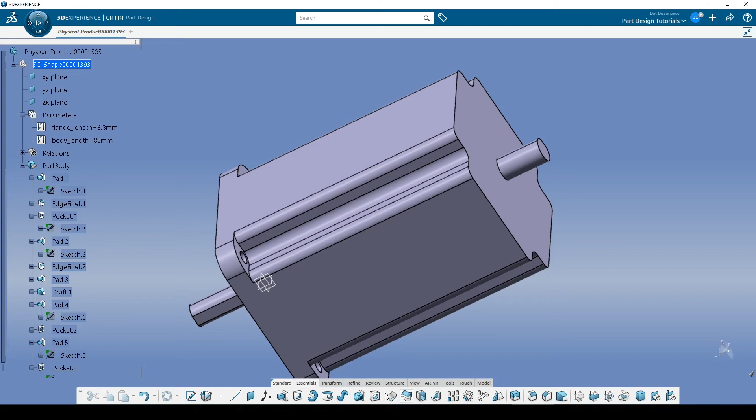Now this one here, I will say I'll go ahead and add a fillet on the back here because it's going to look nice. So let's go with, we want it to look nice also, right? We've way above served our purpose for making a shape that will serve as a spacer so that we could build, let's say, the frame for a conveyor belt. We could have actually just made it a block. We didn't even need to put all this stuff in here, right? We just needed to know that we had the right amount of spacing.

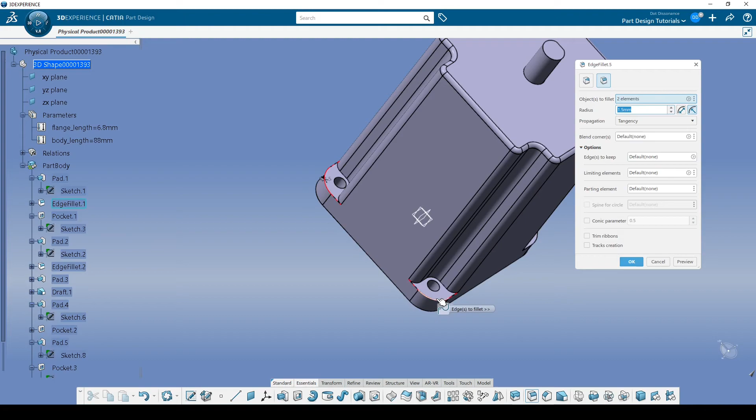What should I make this? Preview 3, I think 3 is a little bit much. Probably more like 2 or 1.5. 1.5 looks good. So that looks probably about the way it normally would be. And the ones down here, if there are any fillets whatsoever, I would say that they're probably like 0.5 or less. So let's whip these around. But like I said, we're going for looks. We want to make it look kind of nice. So we'll go 0.5. Yeah, see, just a tiny, tiny, tiny touch of a fillet.

How about down into here? Should I put a little fillet in here? Probably not, because a fillet is going to screw up the head of the fastener. This flat right here, this bit of land right here, is for the fastener head to sit on, and if there's a fillet in this corner, it's going to sit crooked. It's going to be weird. So we're not going to add it there.

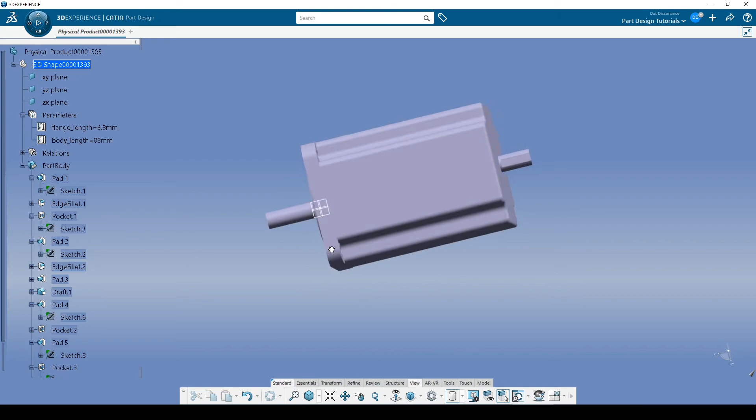All right, other than that, I think we're good to go. I think that is our part. So then we can come down here, we can go to view. If you want a nicer view to look at it, now is the time you'd probably go to shading to take a look at it and see if everything looks nice.

Now, if you forgot to fillet some edges, because again we wanted to deburr some things or show it in that respect, I can go shading with edges, but without smooth edges. And so it'll show me everything that's sharp. And I could look around and go, oh no, that's good. I wanted these sharp, I wanted those sharp, I wanted these smooth. That's sharp because that's a machine surface. Yep, looks good, right? But I forgot a couple things.

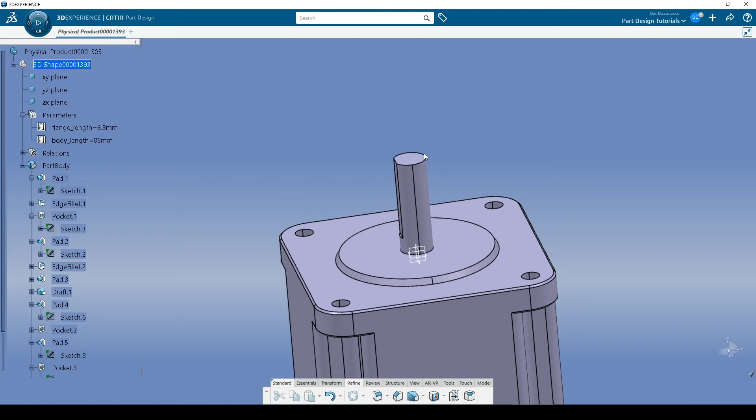We were going to do a little bit of a chamfer on here, right? We did want to put a chamfer there. So we could add that, super small, right? So this here is more like, again, a 0.5, tiny little chamfer. Honestly, I don't think it belongs. I kind of see it in there, but this falls under my rule about a machine face. There is also a chamfer up here, a little bit of a chamfer going on that edge. Again, probably really small, something like that. And then the same over on the other side.

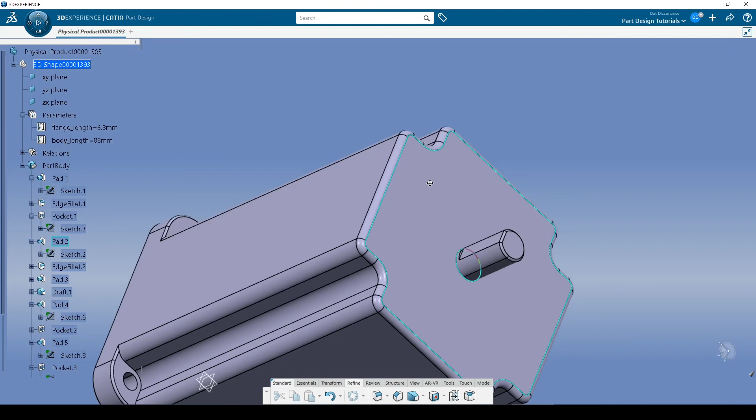Don't, whatever you do, put a fillet here, because remember, this isn't really connected to this. This would normally be assembly.

And then I guess maybe one last interesting thing - this is not an assembly, but we could change colors of things. If you want to change the color of the whole body, you can go here, and I could say, well, this is a stepper motor, let's make it black. I can tell you black is probably going to be too dark. You could look at that and say, ooh, that's neat, but it makes it kind of hard to see.

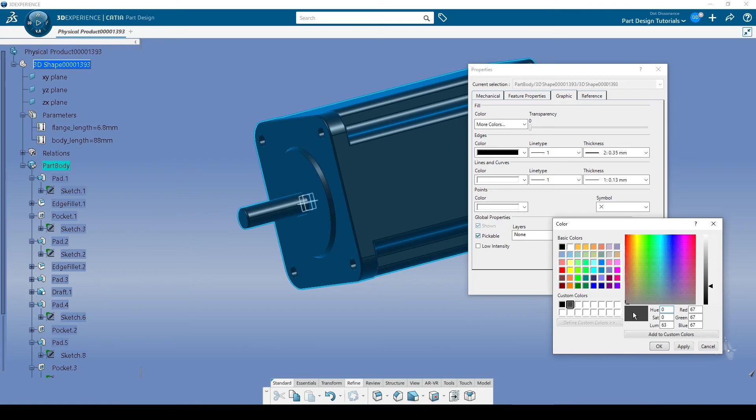What you can do is modify the colors a little bit. Go here, more colors, apply colors. I've already had that color from before, but pick a gray color, say that's pretty good, hit OK, and then look at it and ask is that all right? Now we still see the dark lines because our view has shading with edges on. So we go back to just shading and say okay, sure, that's fine.

Now, if you want to continue, you could change the color of the pad, but then you'd have to change the color of the edge, the chamfer as well, and this pocket right there - you'd have to change all of those. Here's the thing I want to point out, because we like looks. By the way, if you want the full-on look, hide the axis system and the planes, then you can look at it.

But what I want to mention is this is a technical design program. You can go into different types of rendering workbenches in CATIA. We can change the colors, we can do some stuff with it, but it's not about the graphic capabilities, the way it looks. So if you hear me or anybody else talk about things like Blender or Maya, other modeling software where you can do sculpting, those have texture abilities.

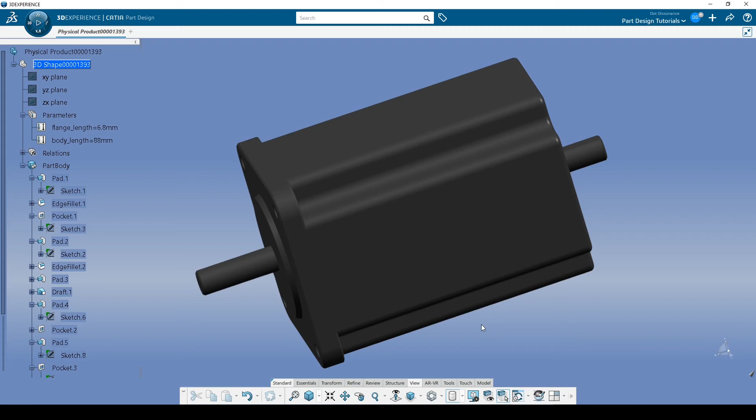So what we would do here, if I want to sell this product, show it shining on the street, in the car, in the shop, wherever, I would bring this and all my product into one of those other softwares, and then I would texture it, skin it so to speak. You would spend all day applying different, not just different colors, but get in here.

Do you see like the white right here? Because it has this light reflecting on it that we just assume is there. You would get into here and right on these edges, just like you see the light - I'm not talking about light in this example - you would get in and I could actually paint just edges with something like abrasion or rust, because over time that's what happened to it, it got kind of worn.

This face, there's kind of a cap on the end here, right about here and right up there, and it's aluminum, and it's been handled. It's been kind of brushed, but not really to look nice, so it has a mottled brush-looking aluminum. You would add that onto it. The steel shafts right here would be the right color and specular, the shine, and such.

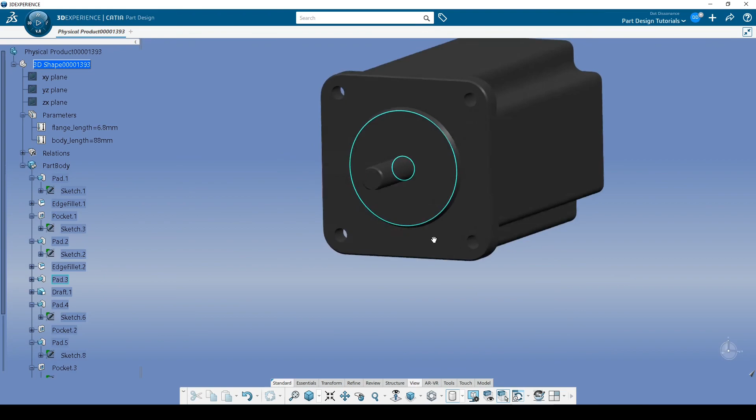So that's why you shouldn't get too upset if you can't make something look very pretty here - it's about its accuracy, right? And then we can take it to the shop and make it. But we can absolutely export this as an STL file, a step file, whatever you need, and get it into those other softwares, okay? So then that's it.

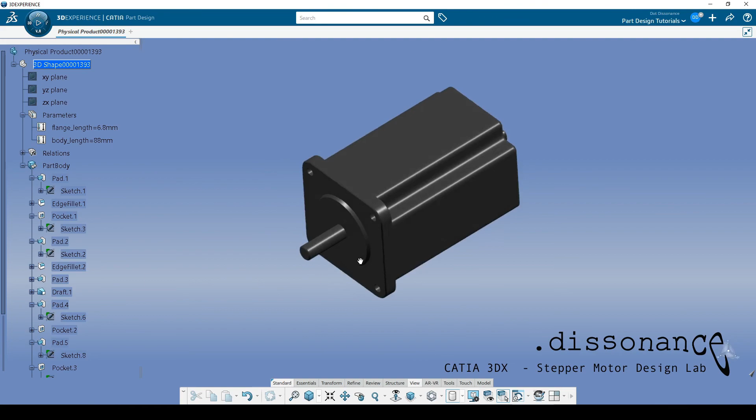We did a lot of stuff in this one, but all the things we've done already before - pads and pockets, we did our fillets of course, we got a little draft here, we used chamfer a touch, a lot of different constraint tools, projections, and different ways to use things inside of Sketch so that we end up with things like this curvature for the fastener head. So a good first real-life practical lab. Do this again on your own, do it multiple different times, and try different ways to go about building it.